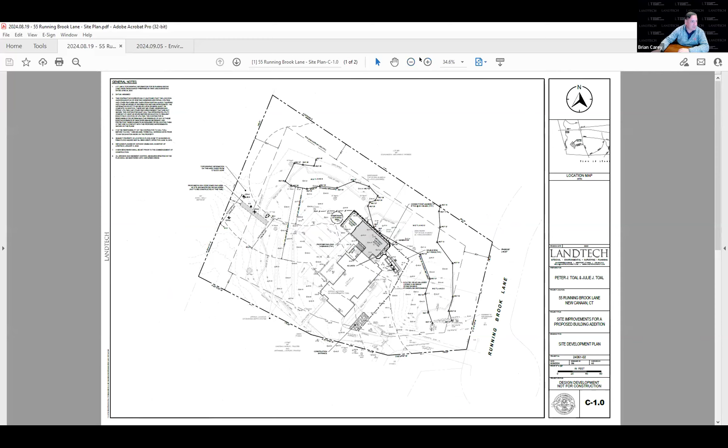So again, the property site is orientated with north going up on the plan. The addition is proposed to be on the northern part of the property. There is an existing pool and flagstone patio, garage. The site is serviced with a septic system and municipal water.

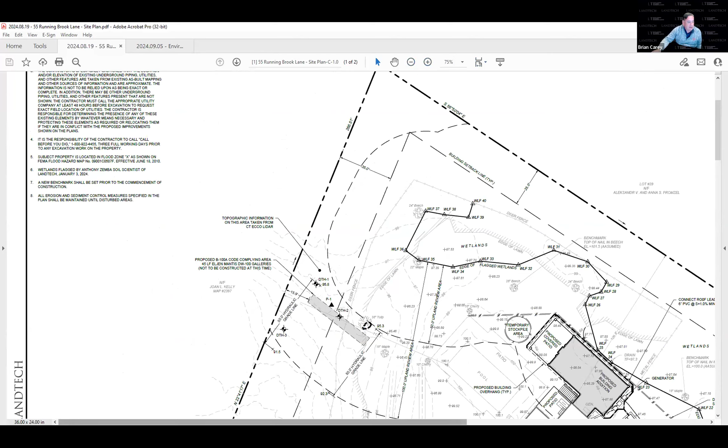There is a little drainage swale that basically takes water off of the road through the town storm system and basically discharges it onto the property.

We understand that this is relatively close. We did look at several feasible and prudent alternatives that we can submit. We're working on those with the architect right now in concert with the homeowner to get their feedback. I know after talking with the director of the department, there is some concern about the proximity of this addition right up next to the wetland.

We do think, in our professional opinion, that we would be able to construct this without really causing much harm to the wetland. We are going to come back. We know that there's additional information that has been requested by the staff that we are going to submit.

One of the problems with basically taking the residential addition and making it exactly parallel with the house is there are windows on this part of the property, which the homeowner would like to try to preserve as best as possible. So we are looking at some alternative layouts.

We will come back with a moderate planting plan. We know that there is some edge of lawn here. We did talk about that with staff. Other than that, the disturbance is really very limited to this one part of the property.

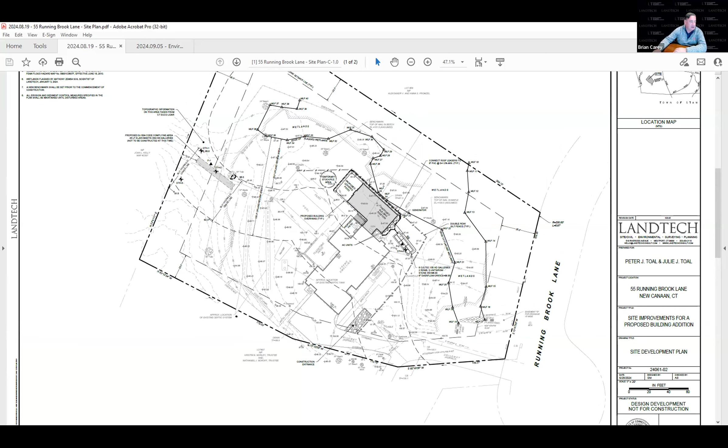Again, we are going to update this to include a small buffer planting plan in this area. With me tonight too is the architect on the project, Jason Linde. He represents the Toals. We've been working hand in hand with him for the past probably 6 months to pull this application together. He was going to talk a little bit about his process and trying to work with the resident to come up with what you see as our preferred alternative. Understanding that we can and will come back with different alternatives for the commission review.

We talked to Kathleen last week. She was very helpful to get on the phone with us prior to the meeting to kind of relay some of the concerns that the commission had after the site walk. So we're aware of those. Mrs. Holland also said that she was going to provide us with more direct comments in the staff report following this meeting, so we look forward to answering those questions and bringing this back to you in a manner that we know will be approvable from the commission, addressing all your complaints. Jason was going to talk a little bit, and I'm here to answer any questions. So I appreciate it.

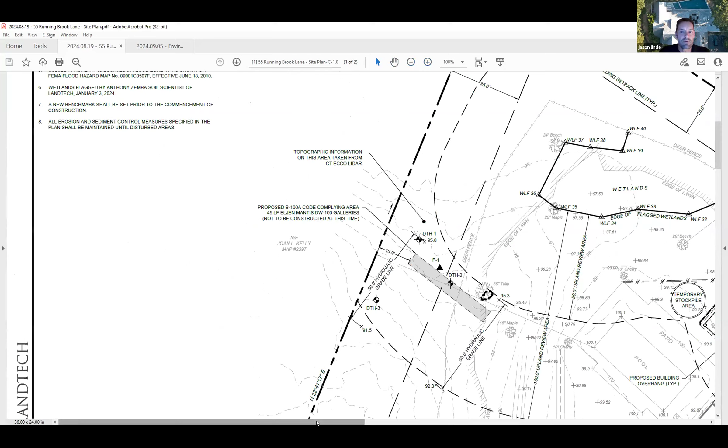Thanks, Brian. My name is Jason Linde, AIA. My firm is called Sentient Design Works. We're based in Dobbs Ferry, New York. We've been working with the Toals for an extended amount of time, trying to find the best configuration and fit for this addition. It did grow a little bit since their initial request, but there are some challenges with trying to get this to best serve them, which includes replacing the access to the basement, but also giving them a footprint that's usable and isn't too narrow.

The footprint looks quite big. It's just a one-story, conservatory-inspired rec room and pool room. I did speak to a local GC, Salvatore Zarello, who might actually be the GC for this project, about the reality of building a frost wall footing this close to the wetland line and trying to understand what amount of disturbance would happen. The good thing is we've got these 2 flags in this zone, and we've got some sections we could send that show how close the overcut really gets to this. The reality is that we can get the concrete work done without touching the wetlands.

They would be very tight up against it, within inches. The reality is the siding and framing just require putting ladders down, so it might be fine to just put plywood down for the ladders to bear on. I leave it up to the board to determine whether that is a comfortable scenario or not. But we're certainly happy to receive your comments and do the best we can to figure out the best resolution.

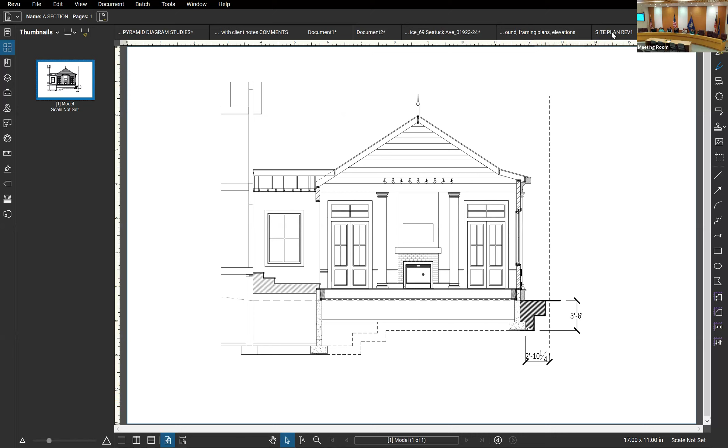Well, thank you for that clarification, but it seems hard to envisage a situation where the workers who are actually doing this construction won't need to go significantly into the wetlands on a recurrent basis in order to complete the job, and also bring construction equipment into that area.

Yeah, so I mean, it's very close to that wetlands line. Yep, absolutely. I believe that they would be probably driving a skid steer, so there would probably be about 6 feet of encroachment from a traction standpoint.

And you said 6 feet for equipment. That's what the feedback from the general contractor included. He felt like the farthest projection was really just aluminum ladders, which obviously has little weight, but for the actual skid steer and cherry pickers, things that have weight, they need about 6 feet of clearance.

So that's quite significant incursion into the wetlands in order to use that equipment. Correct, on a temporary basis for sure. Yeah, that would be a short-term impact, and we will look at ways to mitigate that. There's a lot of, because we're not projecting on filling or grading in that area, so there are temporary measures that we can put in place.

A lot of them are programmatic, not having them run the skid steer through there. The biggest thing would probably be an aerial lift for doing the siding. But we'll look at that and come up with a scope of work that would really limit any work within the wetland area. In addition, the goal would be after the project to come back and do plantings in that area, because currently, as you saw, it was being maintained as lawn. So we'd want to keep some type of vegetative buffer.

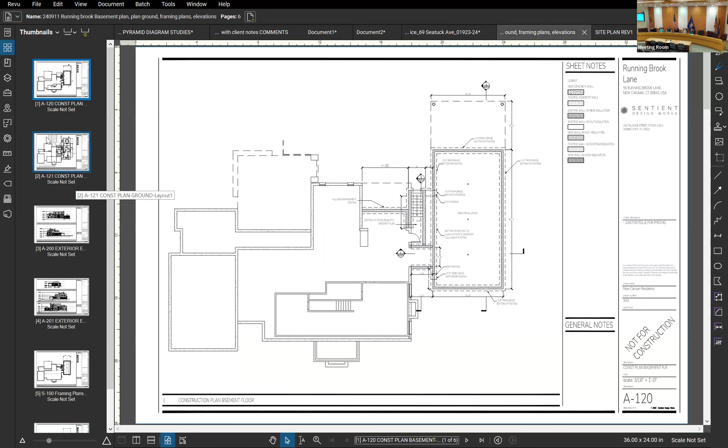Brian, can you pull that site plan back up? Sure.

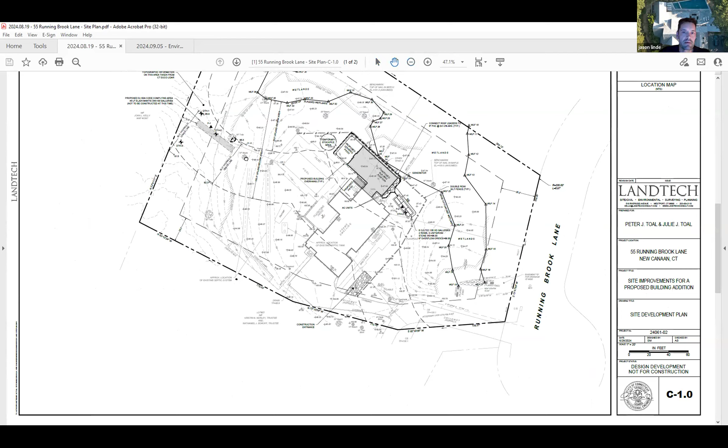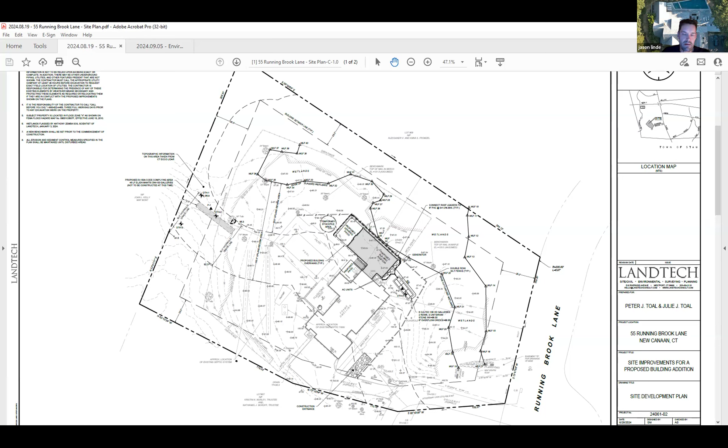So on the left side, we've got a pretty large leaching field for the septic, and then the expansion area, so that's pretty isolated. And then the wetlands line does come pretty close to the pool as it trails towards the backyard. So the opportunity to do something different would have had to be quite detached on the far side of the pool, maybe as just a pool house function, which they were not really interested in. So we were pretty pinned to this zone on the far right side. Our hope was that this would be able to fit, make the client happy, make the Wetlands Commission comfortable, and we would be able to engineer a shallow crawl space without any major overcuts, and collect the rainwater from the roof and put that into the Cultec system. If there was an alternate spot that was ideal, we would be nowhere near the wetlands, but unfortunately, where this house was built, it was kind of smack against the setback on the far left side.

Thank you. Cassie, do you have anything?

Brian, Kathleen Holland for the record. I do want to let you know, Maria Coplet, our town engineer, did review the plans, and in the OpenGov online system she did sign off on the project from a drainage point of view, so they cleared that hurdle with drainage. In addition, Brian also mentioned the health department, the director of health reviewed the proposal and also signed off on the project from a health point of view.

I just wanted to mention that at this point, I don't have anything to add. I think it's important tonight for the consultants to hear from each of you regarding this proposal. If there's something calling your attention to that you'd like to see improved, reduced, or amended, we should probably raise it tonight. I think both Brian and Jason were helpful in the Zoom meeting we had last week, giving them feedback from the site visit and the commission's discomfort with the project's close proximity to the field-located wetlands.

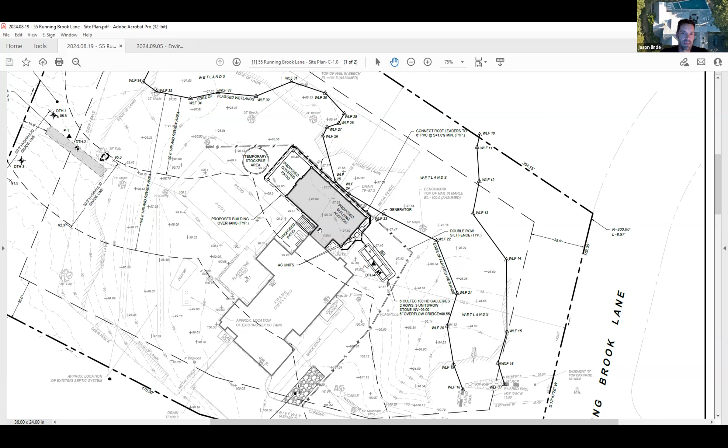If I think that will work, and the commission feels this is good steps in the right direction, it avoids us from a wholesale change. We designed only as far as we needed to put this deck together, so the final engineering isn't complete, but the pre-engineering is there so we know the general configuration, footing size, and all that. So if we're not talking about sticking this in the far backyard, but shaving a couple feet here and there to give ourselves some healthy breathing room, I think that could very much work if that's the spirit of what you guys are looking for.

Yeah, our job is actually to protect the wetlands. So keep that in the back of your mind — any way you can add to that protection will make us happy.

Generally, I'll put together a mitigation report talking about ways to enhance or protect the existing wetlands adjacent to the proposed building. The one good thing about this at this point is the applicant is probably not looking to go to construction until early spring, late winter.

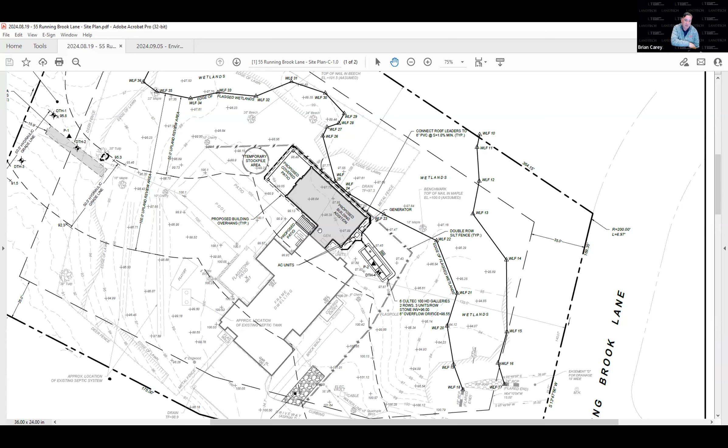So we have a little bit of time as far as the permitting process goes. Our next step, if the commission were to approve this, is just to file for a zoning permit. Jason needs to finish his final architectural plans, but from the standpoint of getting this approved in the timeframes we're looking at, that's not an issue. So if we need to take a little extra time to make sure we're meeting the requirements of the commission, that's not an issue.

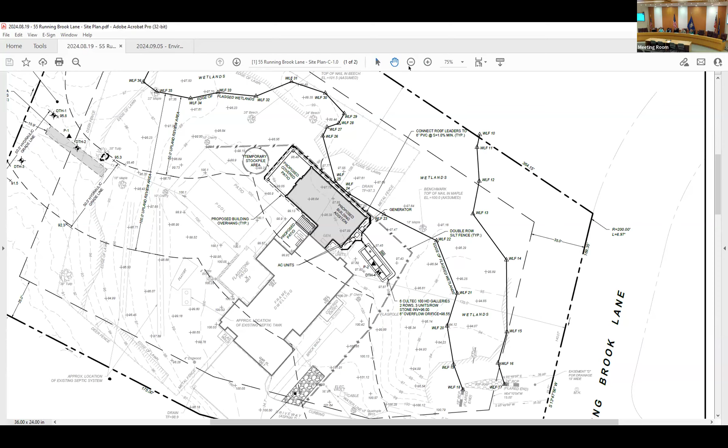Okay, good. Does any other commission have to look at this? Planning and zoning don't have to look at this, do they? No, should they get satisfied with the wetlands, this is a straightforward building permit application, so it would just go through. Brian, I think you mentioned their coverage is okay on the survey. I believe I said earlier that this is a zoning compliant project.

There's no need for any variances, it's just an as-of-right type of zoning permit. So what I would suggest doing, I don't know if anyone else has any other questions. Katie Owsley again - I'm just wondering, Kathleen, are there, because the construction was so close to the actual wetlands, even if this is pulled back a few feet, are there other mitigations? The silt fence isn't very high. I'm thinking of roof shingles and so on that might traverse into the wetland - what are the other mitigation options?

A lot of times we'll use a construction fence. The other thing we'll do, and again this would be a last case scenario - I think there's a way for us to mitigate this before even recommending it - but a lot of times we put down a filter fabric, then a geotextile, then crushed stone, and wrap it. So if there were to be any need to go into the wetland, it's basically not impacting the soils. You're putting something down that can be pulled up very easily.

And the last part of this would be to take off the layer of sod and replant with a wetland mix, a shrub and herbaceous layer directly adjacent - well, it's actually in the wetland in this case - and reestablish that lawn area into a wetland, most likely a wet meadow type scenario. I do have to go back out there to get an idea of what plants we'd be looking at, but obviously they'd be obligate native wetland plants that would do well there. Sometimes wetlands are periodically wet or routinely wet, and determining what plants can go in there is very important. That's something I'd want to look at carefully before putting together a planting plan. But any of those things can be done relatively quickly, so we'd be able to meet the deadline for submission for the next meeting.

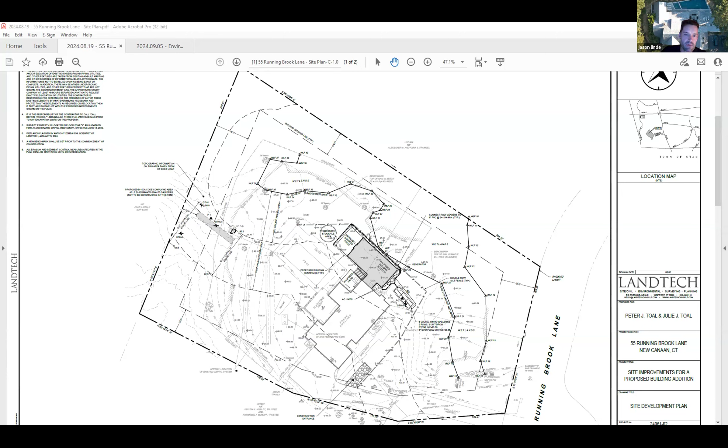Understood. And we had also shared a plan that showed the 4 different distances from the 2 corners and the 2 closest flags. The wetlands line does kind of creep in, it arches in and then pulls back away. So I think if this wetland line was parallel to the building, we wouldn't have proposed this at all because it would be generally, holistically too close. So we'll include that plan with our update, so you guys can see the average distance. But we definitely appreciate your concerns and comments.